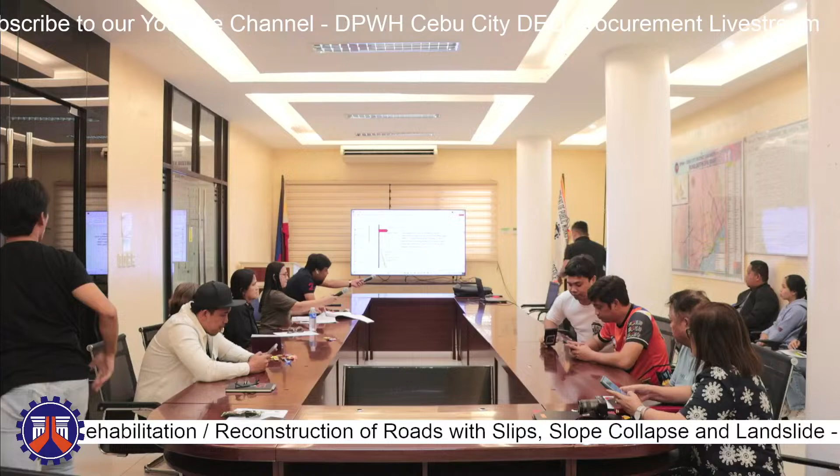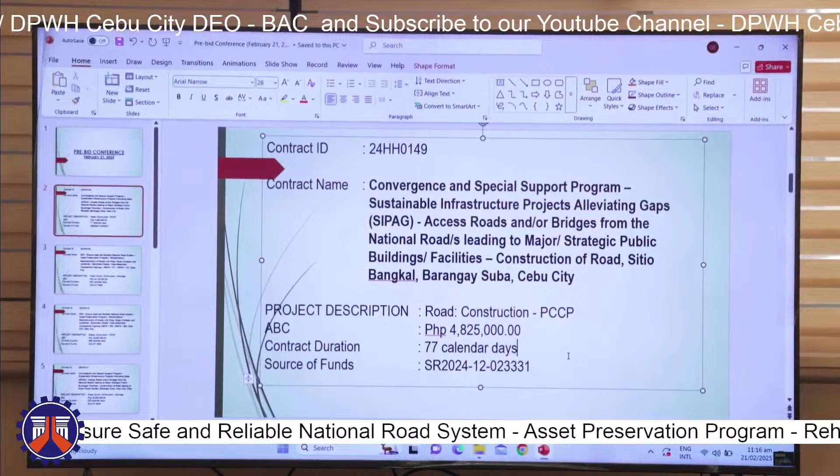Good morning, everyone. For the first project, we have construction of road in Barangay Suba, Cebu City, with a contract ID of 24HH0149, contract name Convergence and Special Support Program, Sustainable Infrastructure Projects Alleviating Gaps, SIPAG, access roads and/or bridges from the national roads leading to major strategic public buildings and facilities, construction of road, Sitio Bangkal, Barangay Suba, Cebu City. Project description: road construction, PCCP, with an approved budget of 4,825,000 pesos.

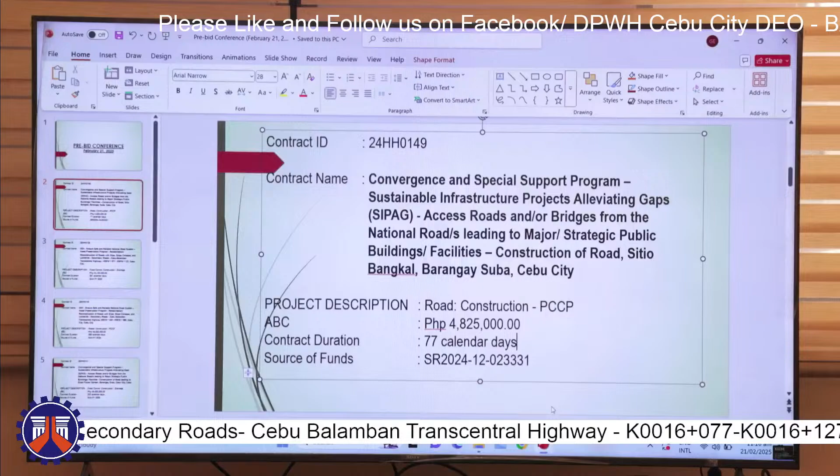Contract duration is 77 calendar days, and the source of funds is SR 2024-12-023331. For the major scope of works, but before that, there are two sections for this project. Section 1, station 4100 to station 4182, and Section 2 with station limits of 3800 to 3870, with a total net length of 152 meters.

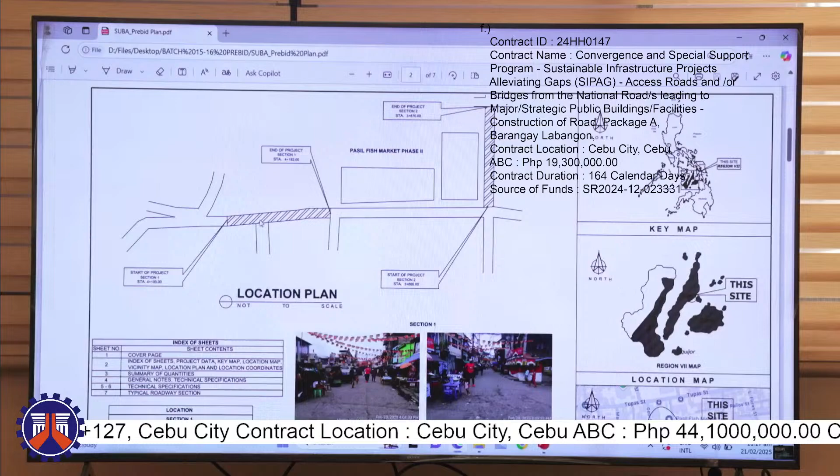For the second page, we can see here its location plan. The project is located near Pasil Fish Market Phase 2, in between Phase 2 and Phase 1. Section 1 is located at the Cebu City Fish Port. So here are the sections, Section 1 and 2.

For the major scope of works, we have surplus common excavation, pipe culverts and drain excavation, gravel fill, subgrade preparation, aggregate subbase course, PCCP with a thickness of 250 mm and a 3-day curing period, and reinforcing steel, structural concrete, metal frames and gratings, reconditioning of drainage structures, manhole, and concrete cover.

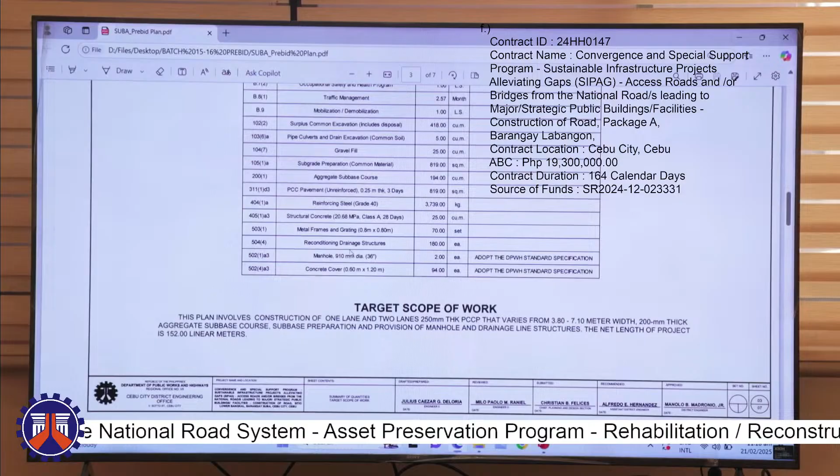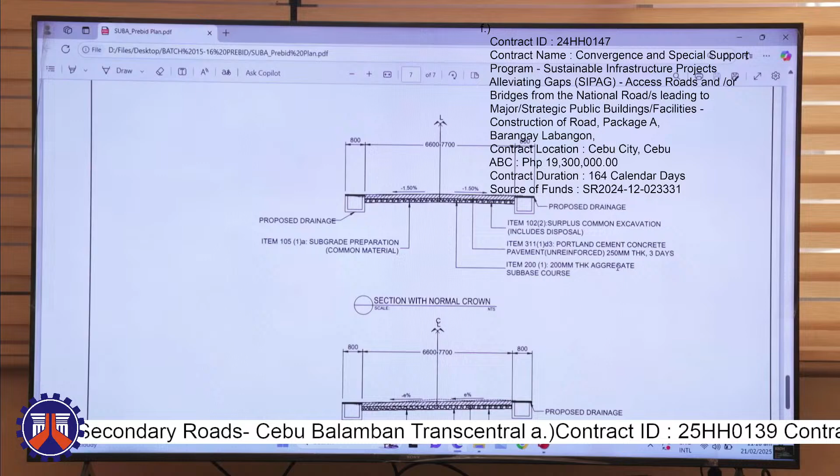For the next page, we have the general notes and technical specification of every item. For the last page, we have the typical road section. The items included are item 1022, surplus common excavation; item 311 D3 for the PCCP with a thickness of 250 mm, 3 days; and item 200(1), aggregate subbase course. We also have the proposed drainage that has a width of 800 mm. That would be all for the Barangay Suba Road Construction Project.

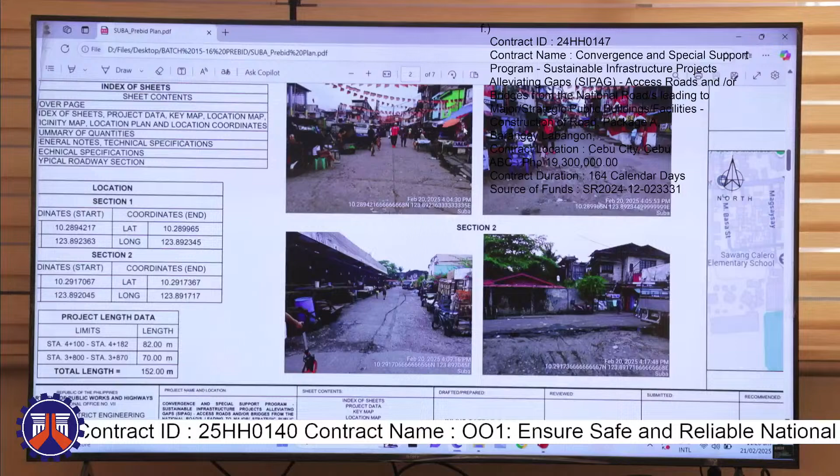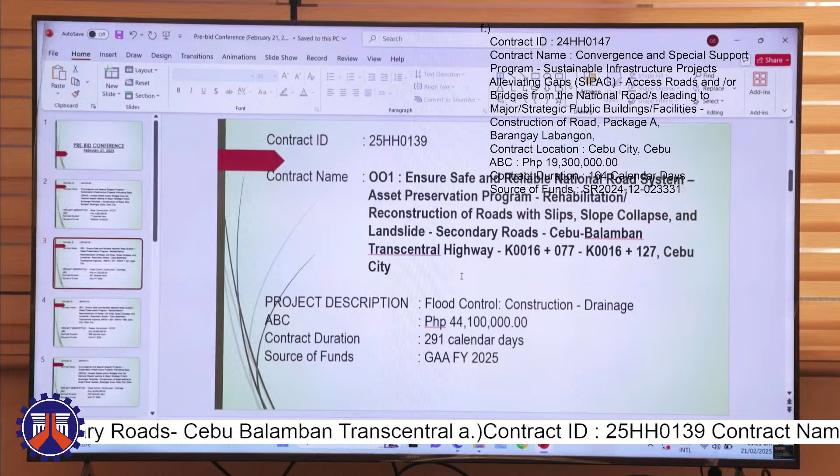Good morning. I'm here to discuss our next project with a contract ID of 25HH0139, contract name: Ensure Safe and Reliable National Road System Asset Preservation Program, Rehabilitation and Reconstruction of Roads with Slope Collapse and Landslide, Secondary Roads, Cebu-Balamban Transcentral Highway, kilometer 16 plus 077 to kilometer 16 plus 127, Cebu City. Project description: this is a slope protection project. The approved budget of the contract is 44,100,000 pesos, with a contract duration of 291 calendar days, and the source of funds is GAA FY 2025.

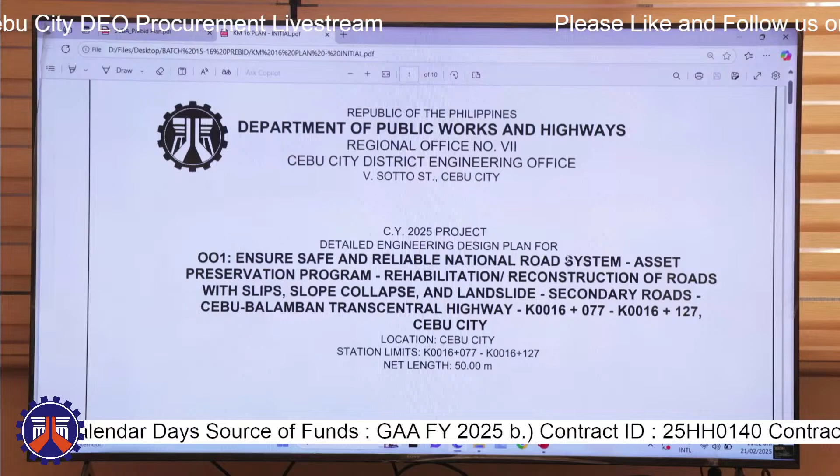And for our plan, our station limits starts at kilometer 16 plus 077 to kilometer 16 plus 127, with a net length of 50 meters.

This one is our location. This one is our end. The end of our project is the start of the previous slope protection project, this one.

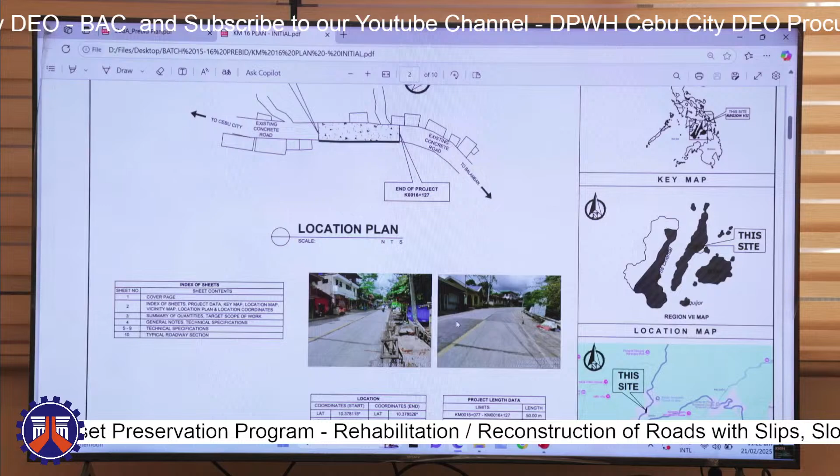Before our existing slope protection project, these are the exact coordinates for the start and the end.

Here is the summary of quantities. This one is our target scope of work.

This project calls for the reconstruction and rehabilitation of existing roads with slip, with the purpose that the foundation will lie on stable grounds, likewise utilizing the part of the slip pavement alignment as the detour road. The target scope of work is to remove the existing slip pavement, reconstruct and maintain it as detour until the duration of the project, which is to be extended up to the end of the slip section.

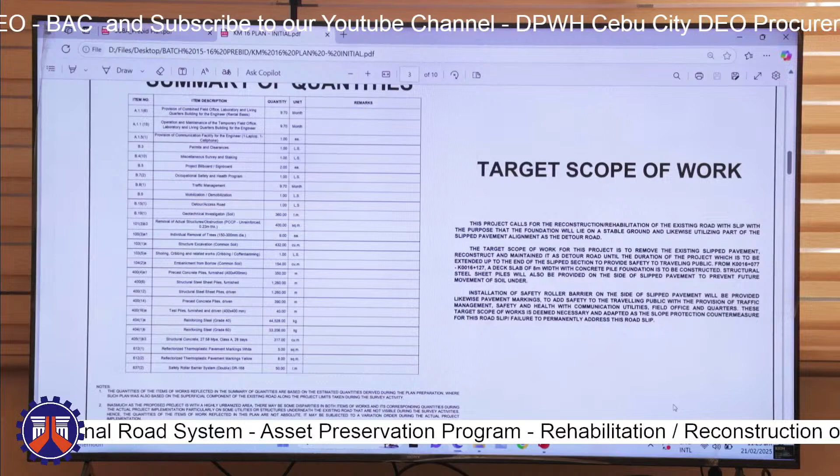From kilometer 16 plus 077 to kilometer 16 plus 127, a deck slab of 8-meter width with concrete pile foundation is to be constructed. Structural steel sheet piles will also be provided on the side of the slip pavement to prevent future movement of soil.

Installation of safety roller barriers on the side of slip pavement will be provided, likewise pavement markings to add safety to the traveling public, with the provision of traffic management, safety and health, communication utilities, field office and quarters.

This target scope of work is deemed necessary and adopted as a slope protection countermeasure for this road slip failure to permanently address the road slip.

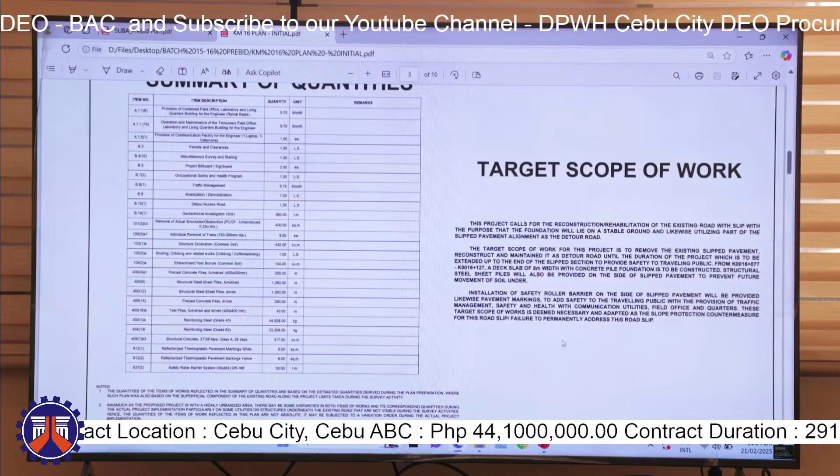This one, we have our precast concrete piles, this one, and structural steel sheet piles.

Next, we have our general notes and technical specifications, and lastly our typical road section, this one.

We have our deck slab here at the top, this one our concrete piles, then we have our sheet piles at the side, and then we have there our safety roller barriers.

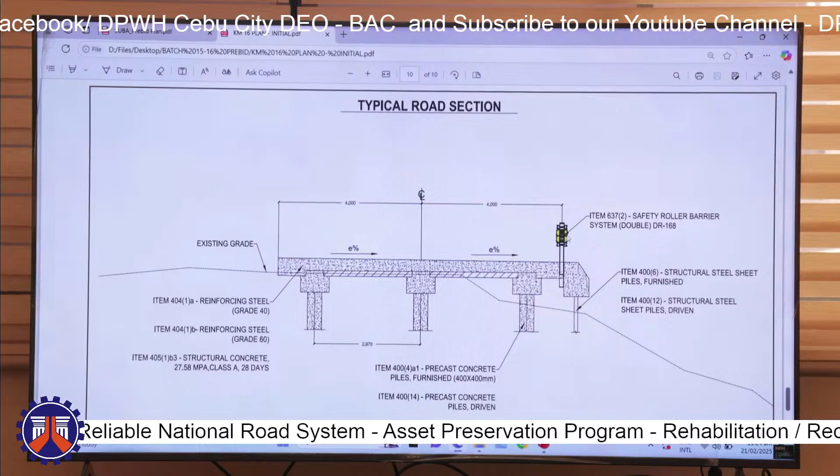And that's all for this project.

Our next project is kilometer 18.

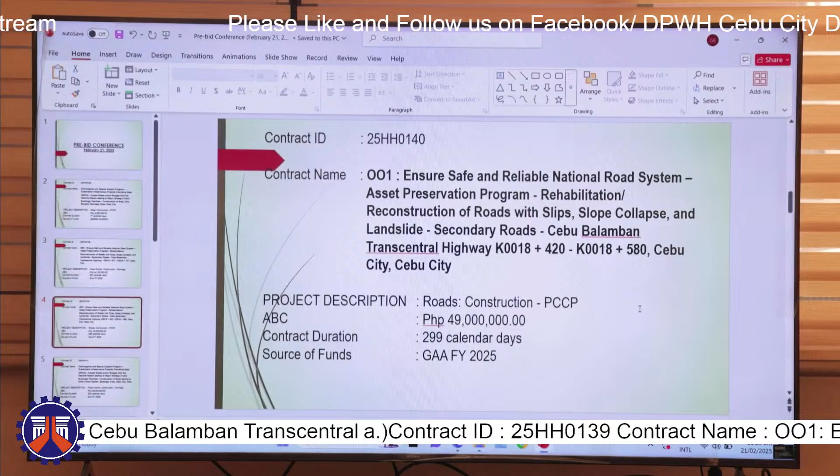The next project is contract ID 25HH0140, with contract name: Ensure Safe and Reliable National Road System, Asset Preservation Program, Rehabilitation, Reconstruction of Roads with Slips, Slope Collapse, and Landslide. Secondary roads, Cebu, Balamban, Transcentral Highway, kilometer 18 plus 420 to kilometer 18, 580, Cebu City, with an ABC amount of 49 million. Contract duration of the project is 299 calendar days, and source of fund is GAA FY 2025.

So the net length of this project is 160 meters. Here is the project location of the project.

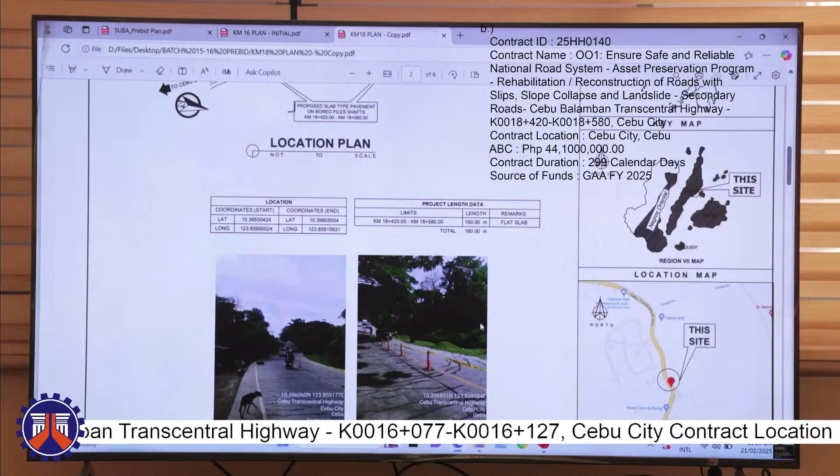So the current condition of the site is, this project is a continuation of our 2021 project. So here's the not updated photos.

For the summary of quantities, we have combined field office and operation and maintenance of the temporary field office, provision of communication facility for the engineer, permits and clearances, miscellaneous, survey and staking, project billboard, signboard, occupational safety and health program, traffic management, mobilization, demobilization.

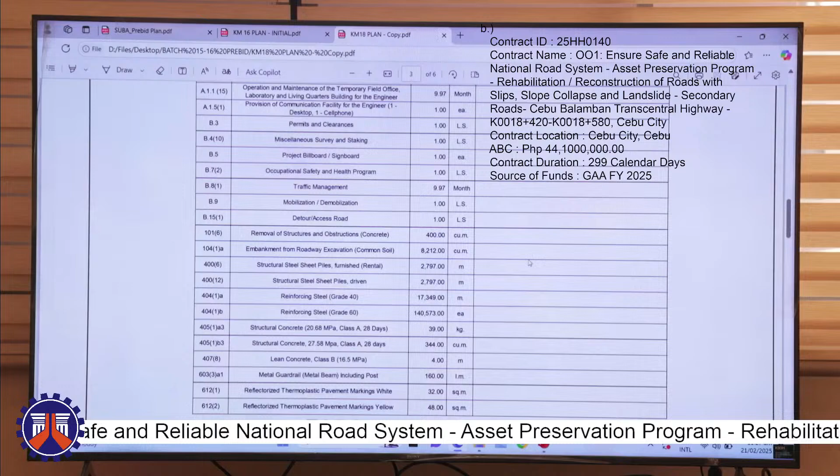We also have detour and access road, removal of structures and obstructions, embankment from roadway excavation, structural steel sheet piles driven, reinforcing steel, structural concrete, lean concrete, metal guardrail, reflectorized thermoplastic pavement markings.

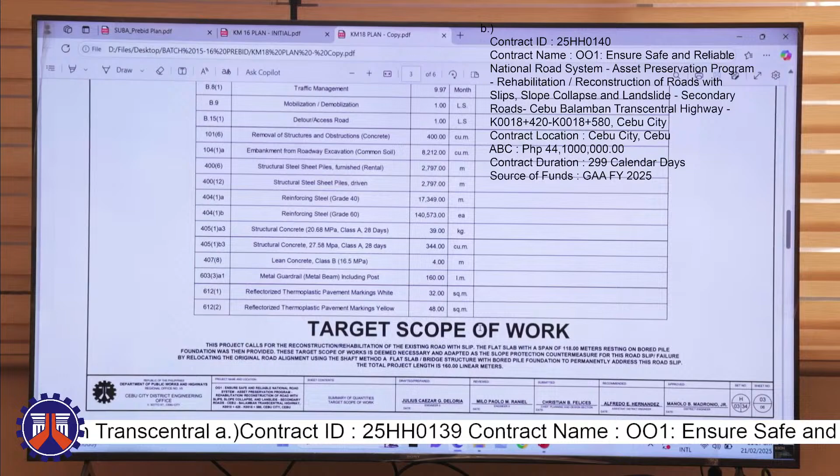So the target scope of work, this project calls for the reconstruction and rehabilitation of the existing road with slip. The flat slab with a span of 118 meters resting on bored pile foundation was then provided.

This target scope of work is deemed necessary and adopted as the slope protection countermeasure for this road slip by relocating the original road alignment using the shaft method and a flat slab bridge structure with bored pile foundation to permanently address this road slip.

The total project length is 160 linear meters. The CY 2021 scope of work is the bored piling. This project is the superstructure now, the flat slab na lang.

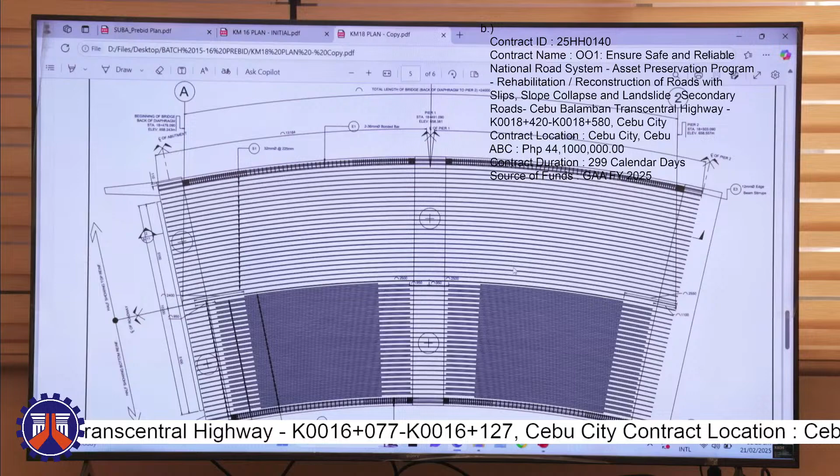So here's the general notes, the sample reinforcement, and here's the typical cross-section of the project.

So that's it for kilometer 18. Next one is...

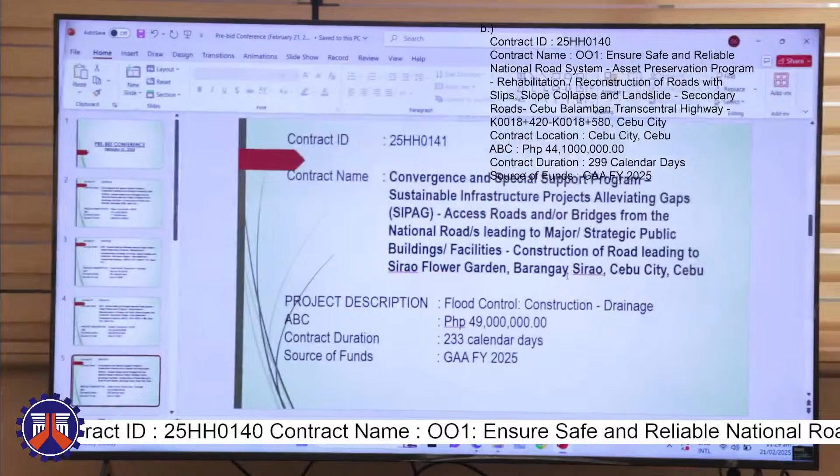Good morning, everyone. So I'm here to discuss the project with contract ID 25HH0141, with contract name Convergence and Special Support Program, Sustainable Infrastructure Projects Alleviating Gaps or SIPAG, access roads and/or bridges from the national roads leading to major or strategic public buildings or facilities, construction of road leading to Sirao Flower Garden, Barangay Sirao, Cebu City.

Forgive us, but the project description for this one should be roads, construction of PCCP, with an approved budget of 49 million and contract duration of 233 calendar days, with its source of funds being GAA FY 2025.

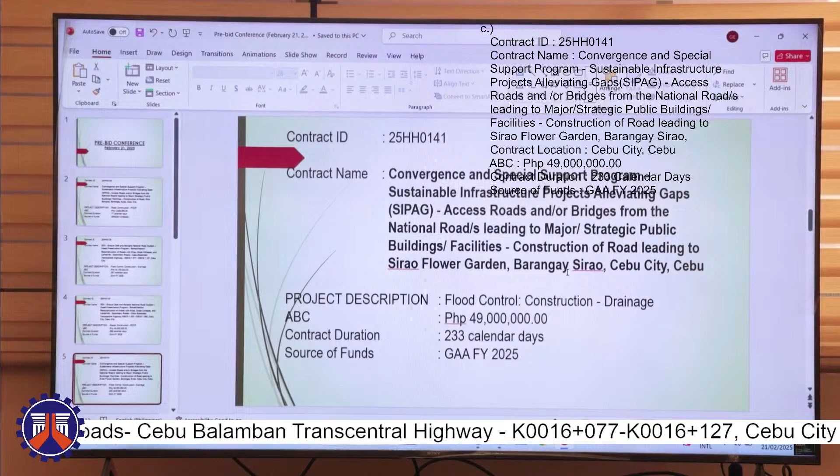So for our station limits, this starts at station 21,000 until station 21,962 with a net length of 962 meters. Here you will see the location of our project.

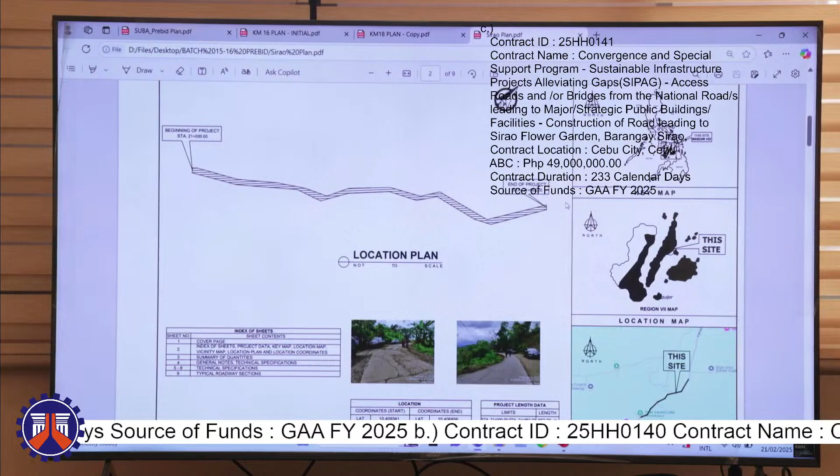So basically this starts right before, like this is the road leading to Sirao Garden, and it ends near Veco, before the Sirao Flower Garden. You will also see here the coordinates of the start and end of our project for easy navigation to our site.

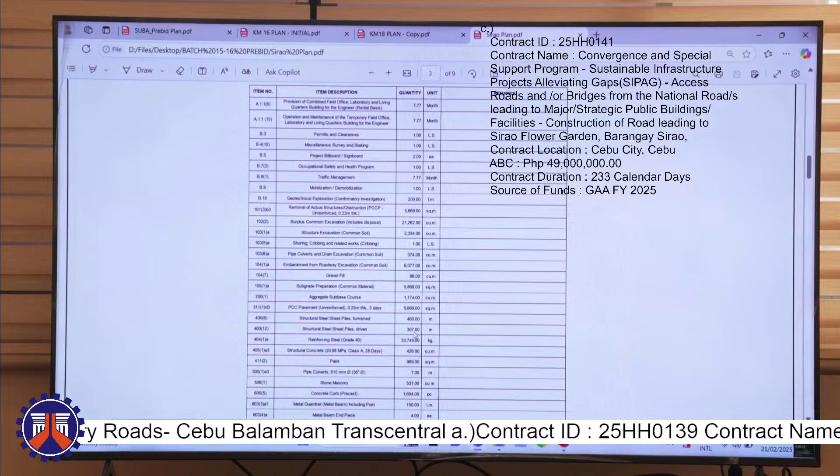Gravel fill, subgrade preparation, aggregate sub-base course, PCCP 0.25 meter thick, 3 days curing, structural sheet piles, structural steel sheet piles driven, reinforcing steel, structural concrete, paint, pipe culverts, stone masonry, concrete curb, metal guardrail, and metal beam end piece.

So here are our general notes and technical specifications included in this project.

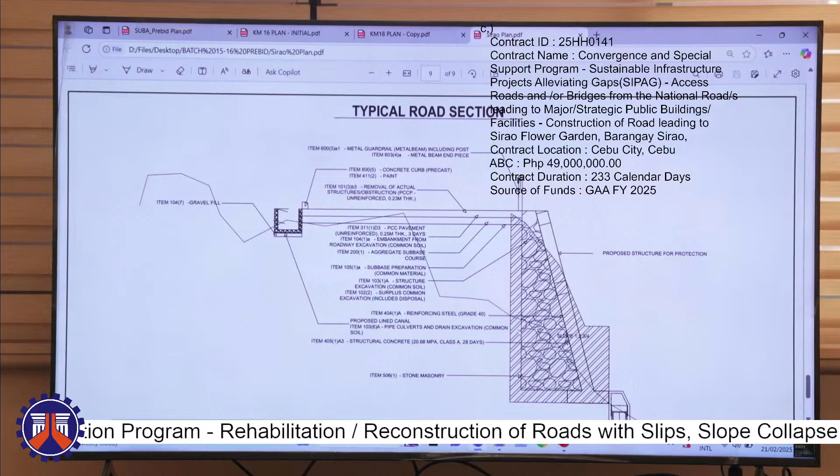And here is our typical roadway section. Basically, most of our project only includes construction of PCCP, but almost at the end of the project, we have slip protection going towards Veco. So you can see here that we construct PCCP with lined canal on our left side and slip protection on our right side.

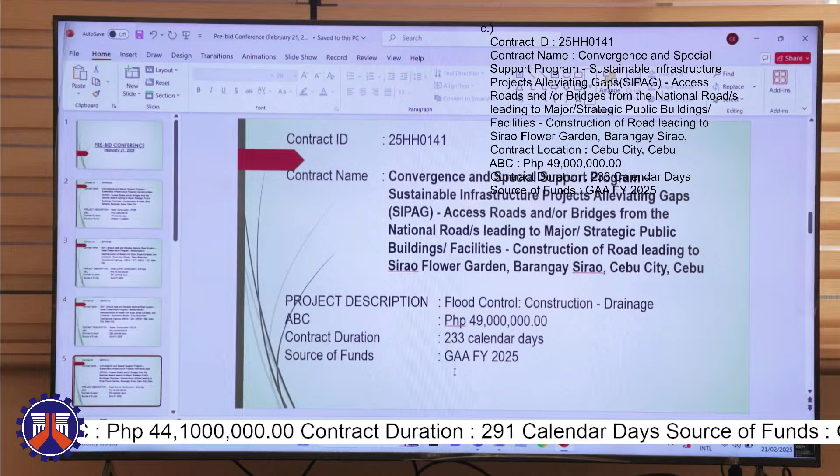Here, the stone for the protection as well as the structural sheet piles are furnished and driven right here. Other scope of works include the reinforcing steel, concrete, and our proposed lined canal. Yes sir, concrete is here. So that's all for this project.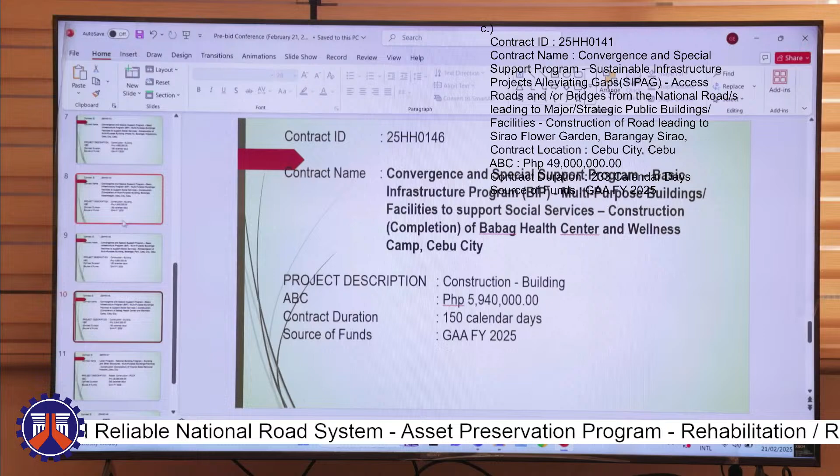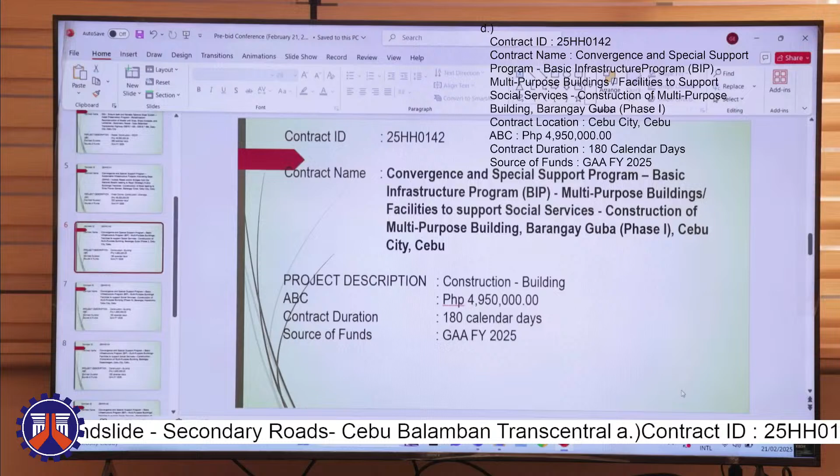Morning everyone, so let's continue. Contract ID 25HH0142 with the contract name Convergence and Special Support Program, Basic Infrastructure Program or BIP, multipurpose buildings, facilities to support social services, construction of multipurpose building, Barangay Guba Phase 1, Cebu City, Cebu, with the project description construction of building, with approved budget of contract 4,950,000, and contract duration of 180 calendar days, with its source of funds GAA FY 2025.

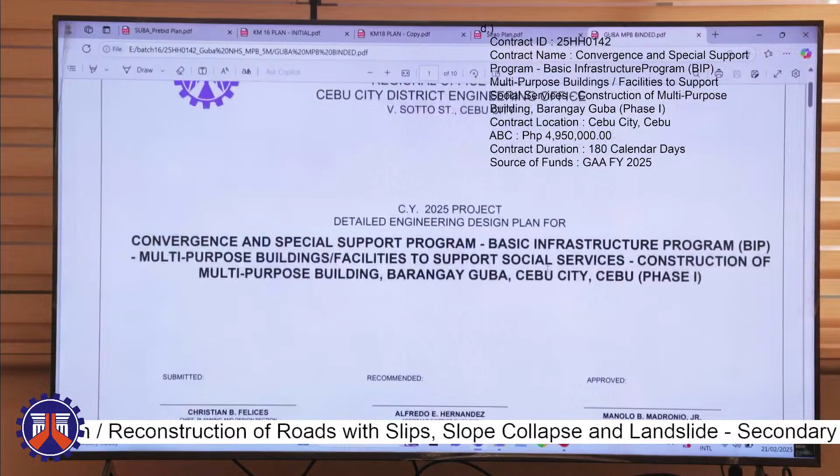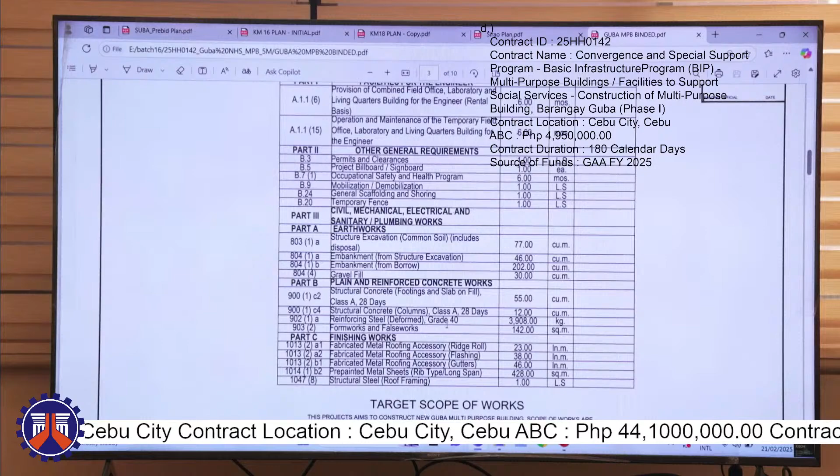So for this project, this is located at Barangay Guba National High School. The project is a construction of covered court. So this is the location. Its main scope of works consists of earthworks and structural works. The dimension of the covered court is 20 by 16 meters only with 10 columns.

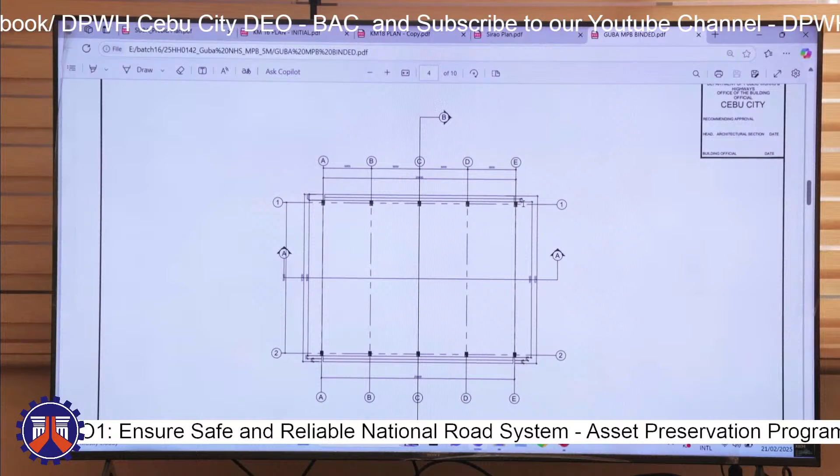There actually is an embankment since the floor is not level there. So there is item 804-1B embankment. And then 900-1-C2 structural concrete footings and slab on fill. Next is structural concrete columns. And then 902-1A structural reinforcing steel deformed bars grade 40.

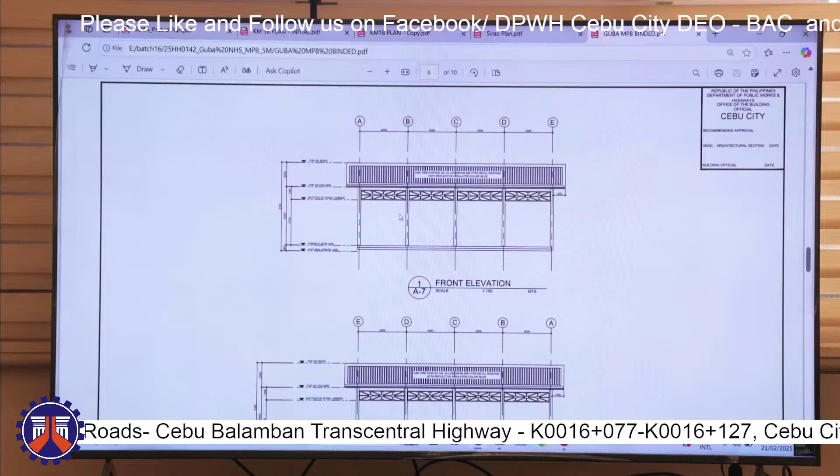Next, we have the roofing or finishing works. So 1013-2A1 for the ridge roll. And then there's flashing included and gutters. And then pre-painted metal sheets or rib type long span. Also included is the structural steel roof framings, trusses, and truss girders. So that's all for Barangay Guba. Thank you.

142, yes sir, Guba phase 1.

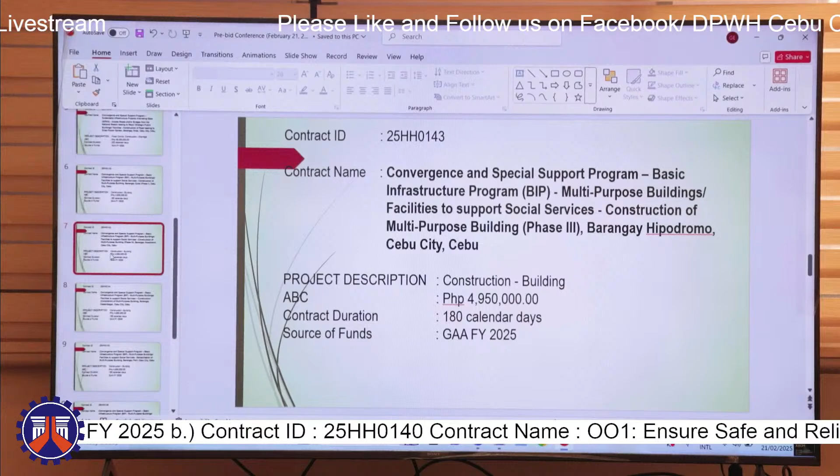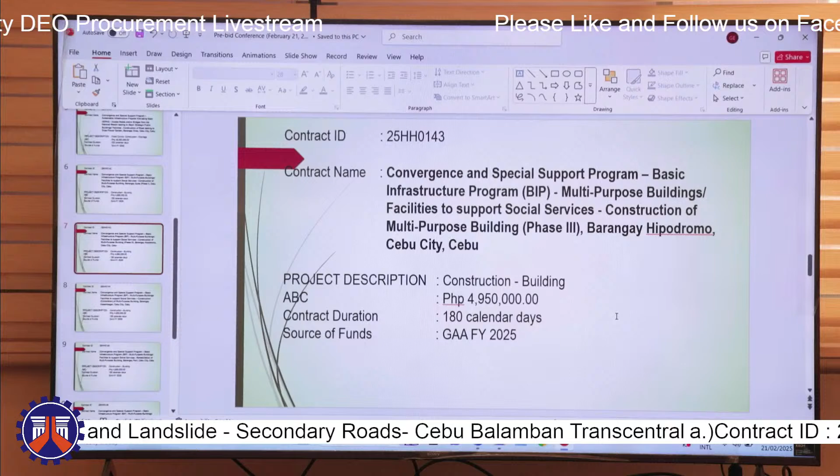Good morning. Next is the contract ID 25HH0143. Contract name is Convergence and Special Support Program, Basic Infrastructure Program, Multipurpose Buildings or Facilities to Support Social Services, Construction of Multipurpose Building, Phase 3, Barangay Hipodromo, Cebu City, Cebu. Project description is construction of building. And the approved budget of contract is 4,950,000 pesos, with a contract duration of 180 calendar days, and the source of fund is GAA FY 2025.

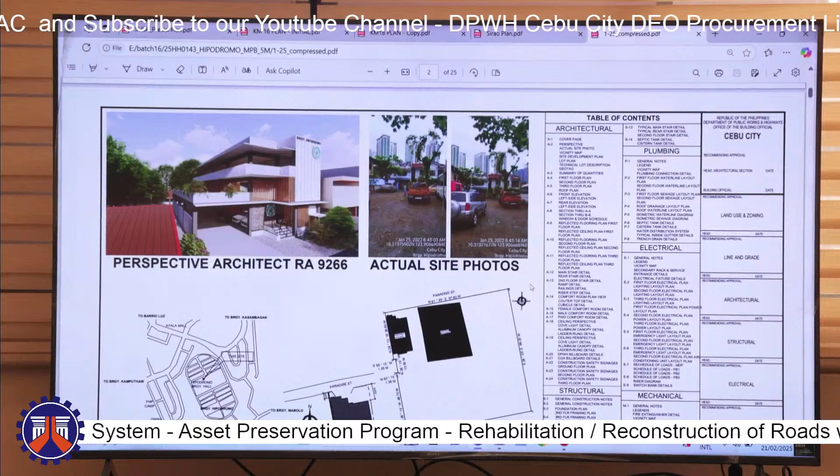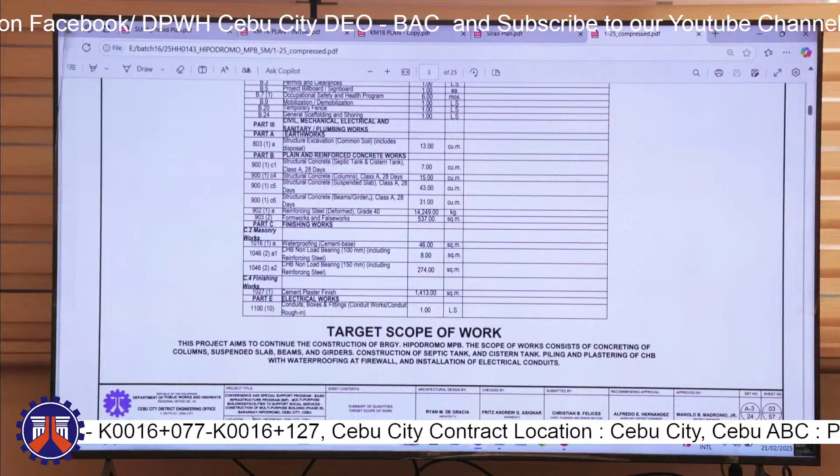So basically, this is just the continuation of the ongoing construction in Barangay Hipodromo. Yes, Hipodromo. So this is the actual site photos. And the summary of quantities and major scope of work is the construction and concreting of septic tank and cistern tank, the columns, suspended slab on third floor, beams and girders, and piling and plastering of CHB, waterproofing, and installation of roughing ins.

So phase 3 only consists of concreting from A to D. So columns from A to D and the suspended slab from A to D, from second floor to third floor. That's all.

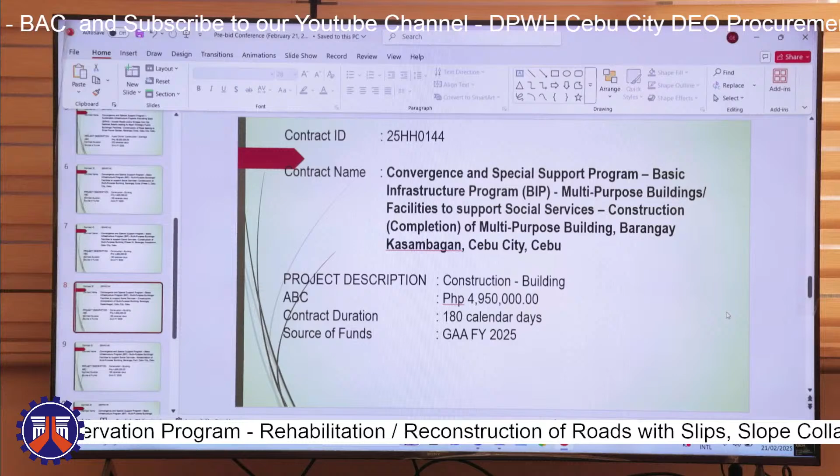Next, contract ID 25HH0144 with the contract name of Convergence and Special Support Program, Basic Infrastructure Program, Multipurpose Buildings or Facilities to Support Social Services, Construction, Completion of Multipurpose Building, Barangay Kasambagan, Cebu City, Cebu, with a project description of construction of building, and the approved budget of contract of 4,950,000 pesos, and the contract duration of 180 calendar days, and the source of fund is GAA FY 2025.

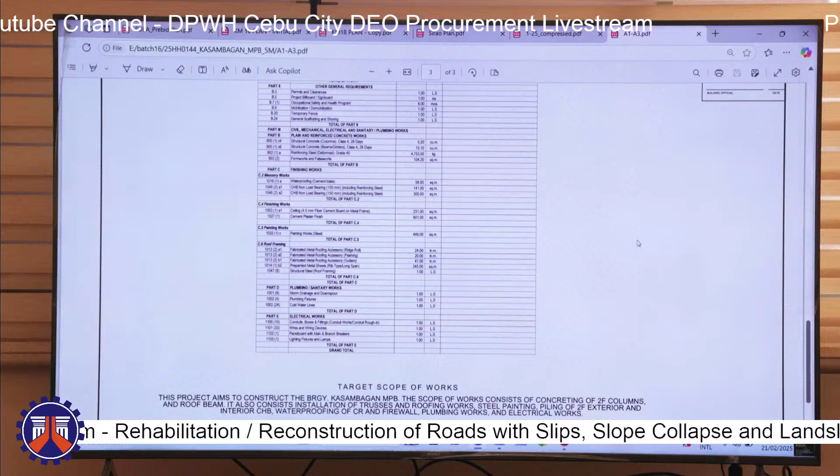So this is also a continuation of the ongoing construction there in Barangay Kasambagan. So the major scope of works consists of concreting of columns, beams, and girders at the second floor of the building, then piling and plastering and waterproofing of CHB in second floor, then the roofing works.

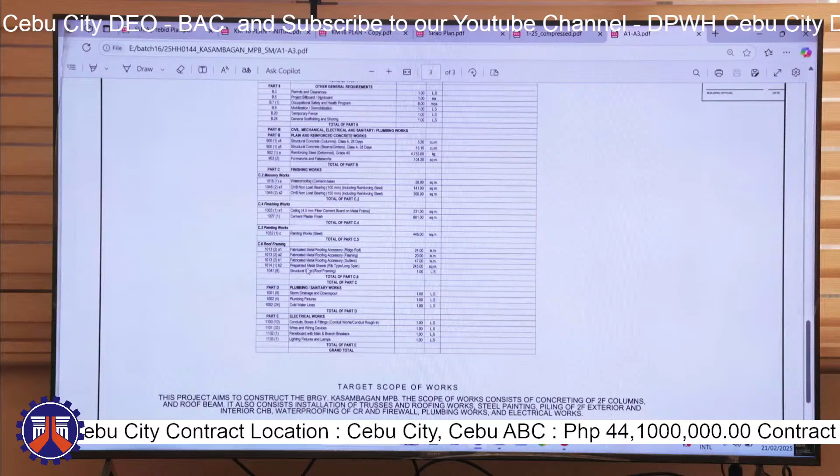Which includes the trusses, ridge roll, flashing, gutters, and pre-painted metal sheets, rib-type long span. Then the installation of downspout, plumbing fixtures at first floor and second floor of the building, and cold water lines. And also the electrical works, which includes roughing ins, wirings, panel boards, and lighting fixtures.

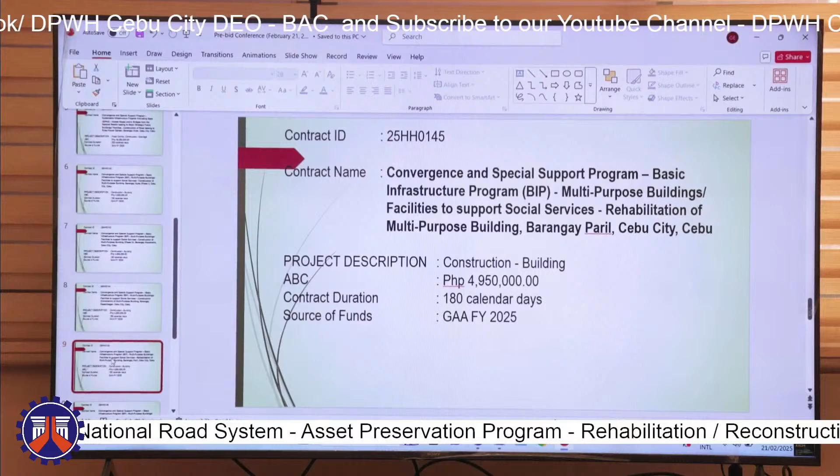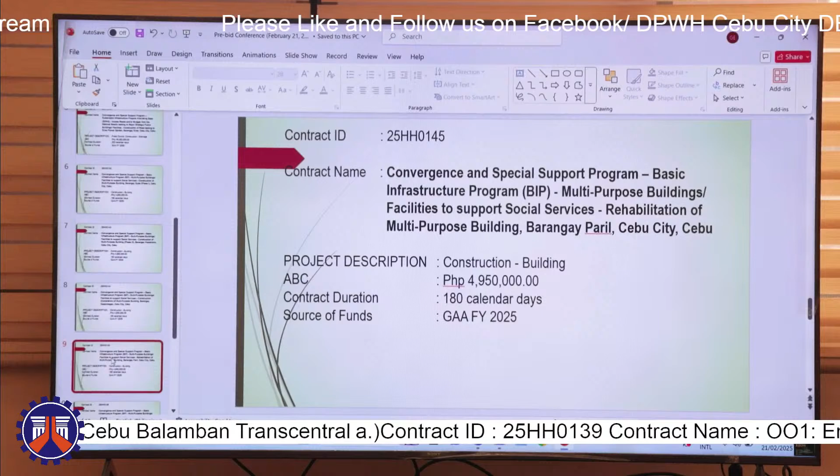Next. Good morning everyone, I will discuss Contract ID 25HH0145 with Contract Name Convergence and Special Support Program, Basic Infrastructure Program BIP, Multipurpose Buildings or Facilities to Support Social Services, Rehabilitation of Multipurpose Building, Barangay Paril, Cebu City, Cebu, with the project description construction, building, and approved budget of contract 4,950,000 with contract duration 180 calendar days and source of funds GAA FY 2025.

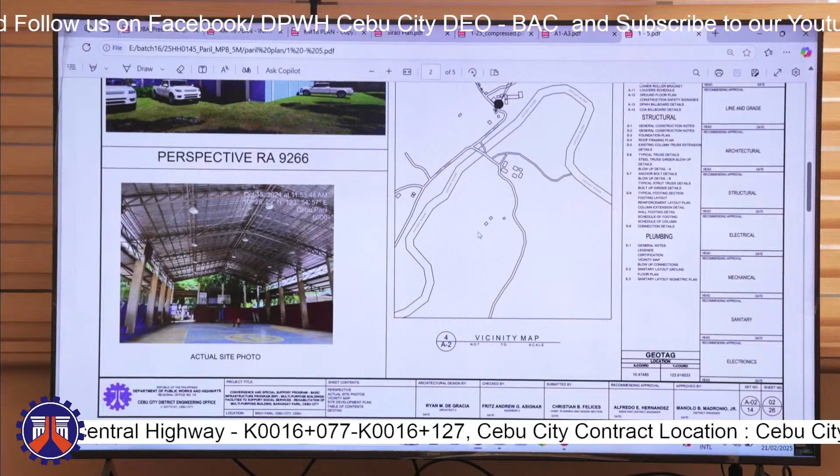So this is the perspective and the location of the project. For the summary of quantities, the major scope of work includes extension of the main roof and replacement of the roofing sheets of the canopy. So that is item 1013-2A1 fabricated metal roofing accessory ridge roll, 1013-2A2 flashing, 1013-2B1 gutters, 1014-1B2 for pre-painted metal sheets rib type long span, and 1047-8 structural steel.

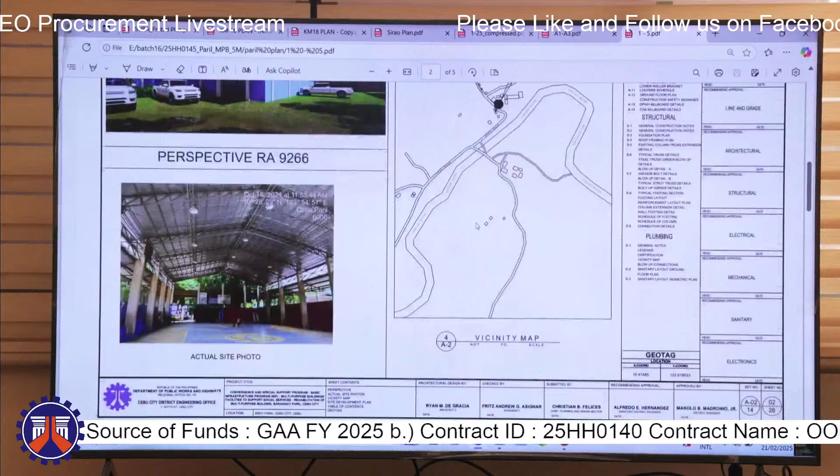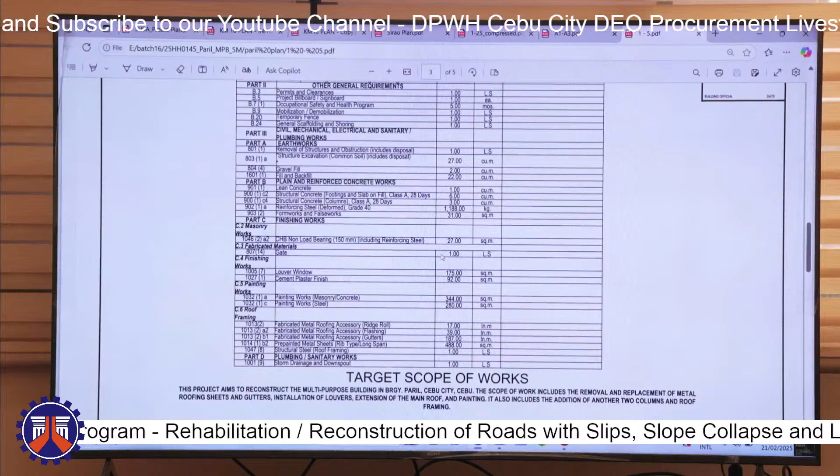Then it also includes the construction of 2 additional columns, item 900-1C2 and item 900-1C4 structural concrete columns. Then we also have the extension of the fence and replacement of the gate. Then also installation of louvers, item 1005-7 louver window. And lastly, painting works, item 1032-1A painting works for masonry or concrete, and 1032-1C painting works for steel. That's all for Barangay Paril.

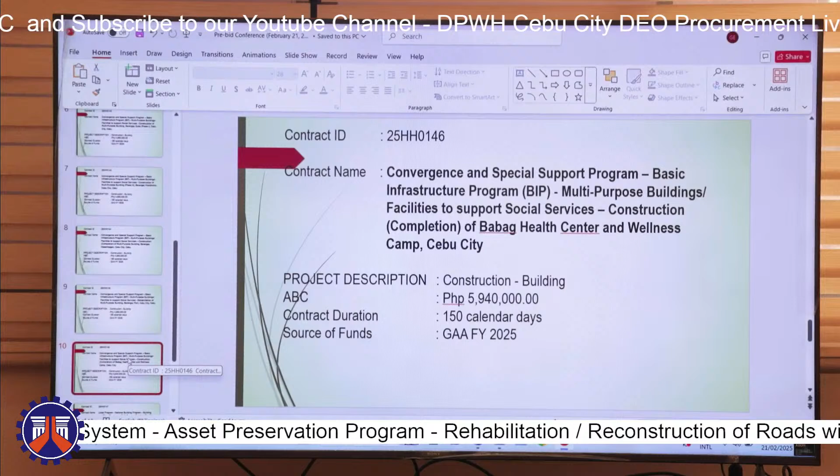Next is the contract ID 25HH0146 with a contract name of Convergence and Special Support Program, Basic Infrastructure Program, Multipurpose Building or Facilities to Support Social Services, construction completion of Babag Health Center and Wellness Camp, Cebu City, with a project description of construction of building and approved budget of contract of 5,940,000 and a contract duration of 150 calendar days, and source of fund is GAA FY 2025.

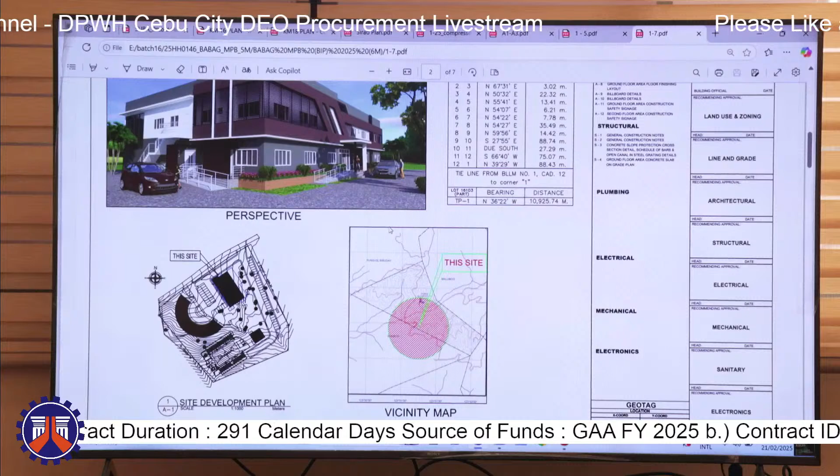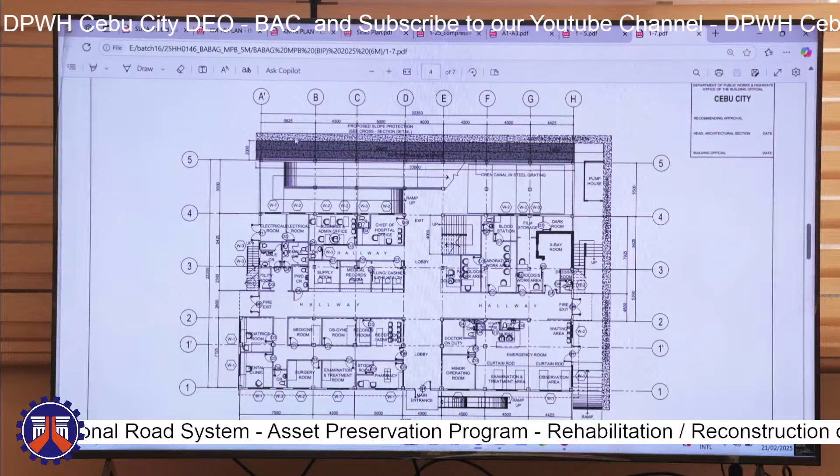So the major scope of works consist of structural concrete of slope protection with a length of 26 meters and concreting of open canal with 33 meters long. This is the proposed slope protection at the site and the proposed open canal. It also includes the glazed tiles in this site and unglazed tiles in the comfort rooms and ramp, and also the fabrication and installation of metal frames and gratings for the open canal.

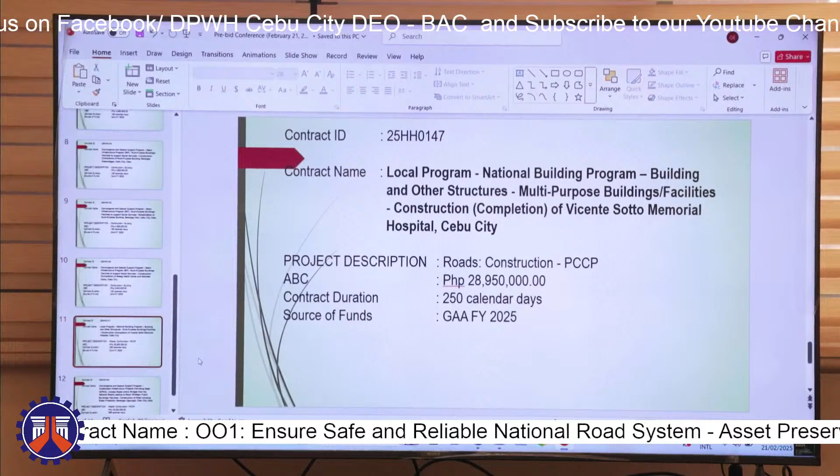Next, for contract ID 25HH0147, contract name, local program, national building program, building and other structures, multipurpose buildings, facilities, construction completion of Vicente Sotto Memorial Hospital, Cebu City, with project description, buildings, construction of buildings. Approved budget for contract is 28,950,000 with a contract duration of 250 calendar days, and its source of funds is GAA FY 2025.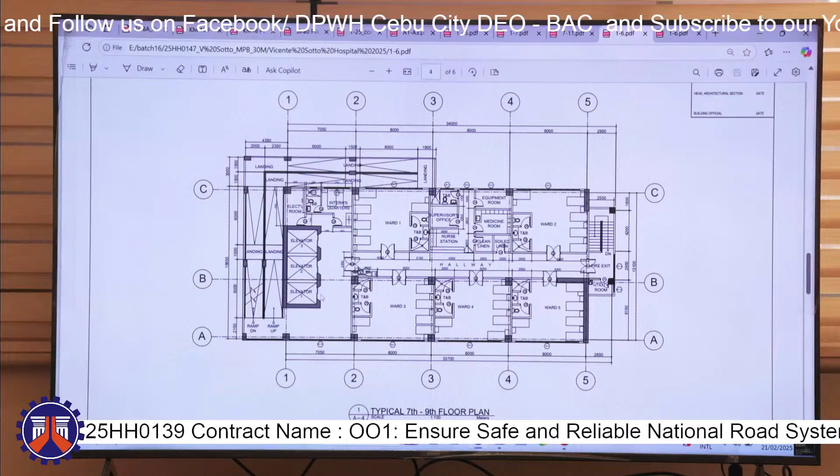Next is the CHB installation, located at the 8th floor to the 9th floor level to enclose the whole level, with included also the cement plaster finish and the painting works in this area.

Next is the aluminum frame glass doors located at the 8th to 9th floor level also, same with the glass windows, sliding type, fixed type, and awning type, all located at the 8th to 9th floor level.

And for the railings, we have the railings here at the ramp side and the fire exit side. It's the same from 7th to 9th floor as well.

Next is the ceiling works, located at the 8th floor and the 9th floor level, so the whole area will be installed with the ceiling and the painting works.

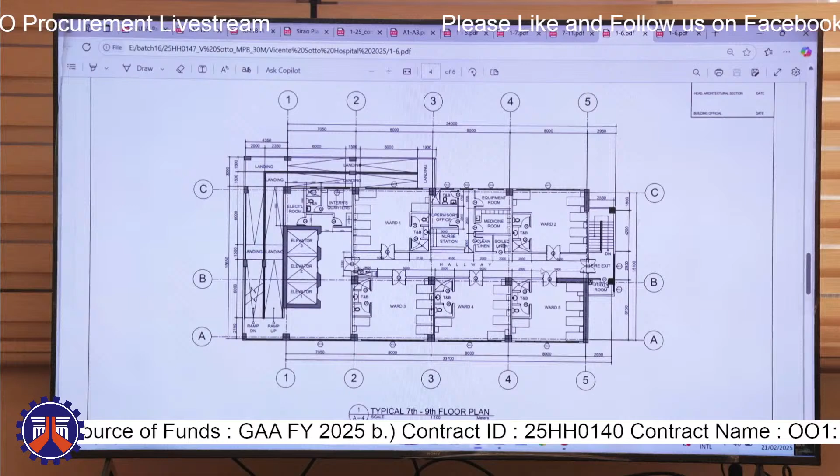Next is glazed and unglazed tiles, same location, 8th floor to 9th floor. Glazed tiles for the common area and unglazed tiles for the comfort rooms.

And next, lastly is the installation of the oxygen, nitrous oxide, gas, manifold and duplex vacuum pump, medical air outlet, medical oxygen outlet, and medical vacuum outlet, all mechanical works to be embedded, from 7th floor to 9th floor level.

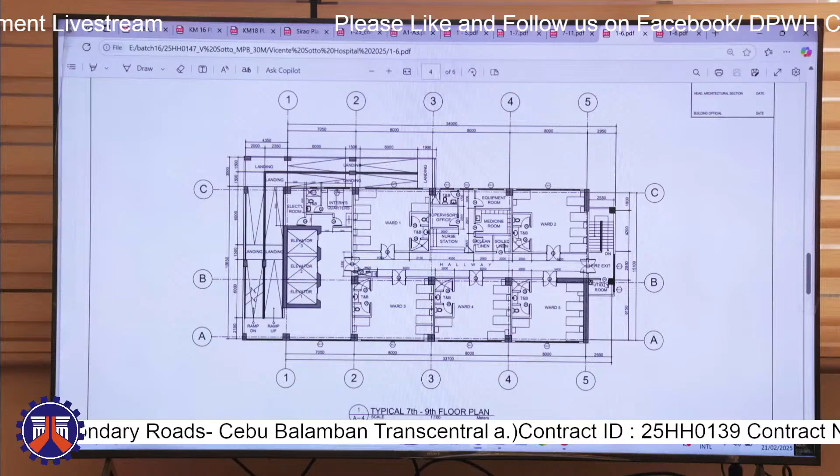And lastly is the installation of the air conditioning unit from the 8th floor to 9th floor. So that's all for Vicente Sotto.

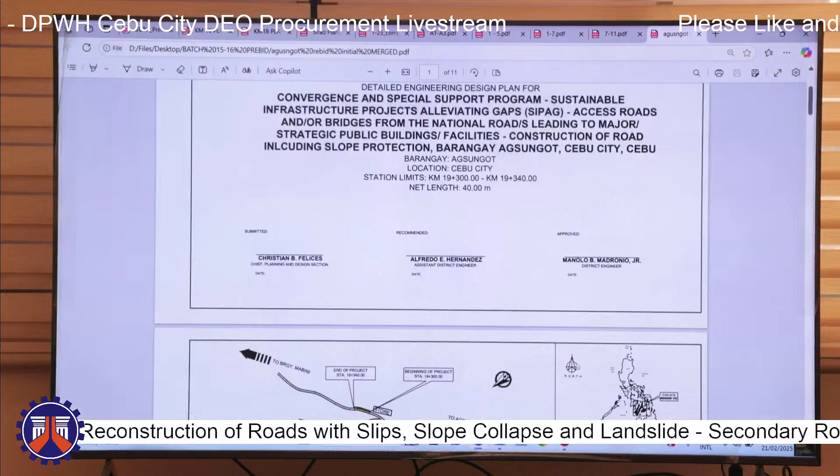Good morning everyone. With contract ID 25HH0148, Convergence and Special Support Program, SIPAG Access Roads and Bridges from the national roads leading to major strategic public buildings, facilities, construction of road including slope protection, Barangay Agsungot, Cebu City, Cebu.

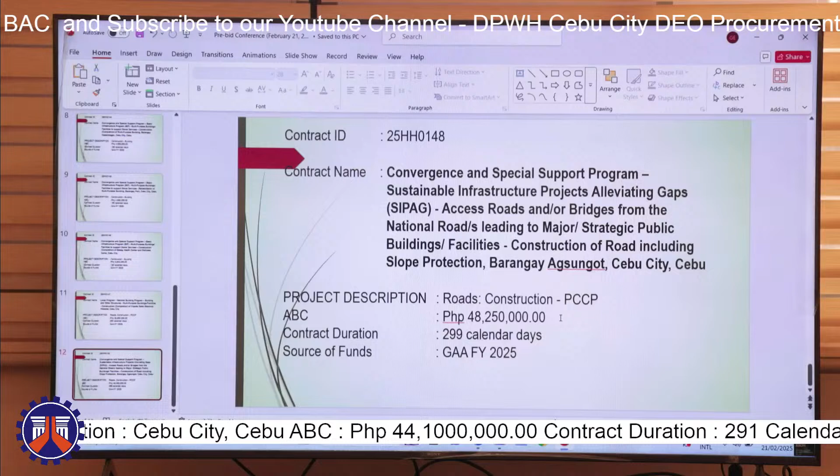The ABC of this project is 48,250,000 with a contract duration of 299 calendar days, and its source of funds is GAA 2025.

So the station limits of the project is from 19,300 to 19,340, having a net length of 40 meters. Then the location map of the project.

The project will provide slope protection at the left side and then slip protection at the right side, and we will also work on the PCCP.

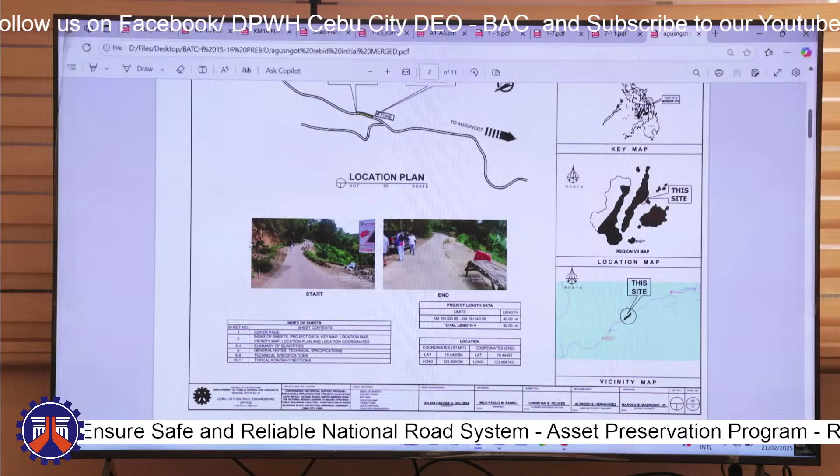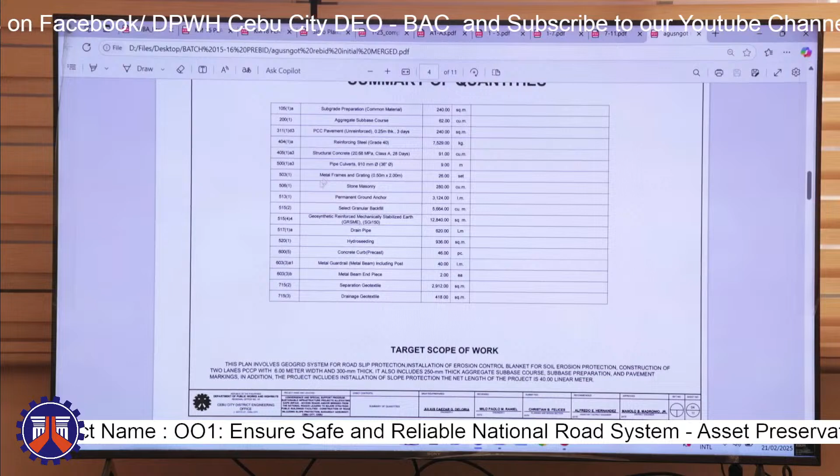As for the summary of quantities, we have the usual scope of works, and then for the major scope of works, we will provide detour or access roads, removal of existing PCCP, removal of structures and obstruction concrete, surplus common excavation, surplus excavation of hard rock, structure excavation, shoring and cribbing, pipe, culvert, and drain excavation, embankment, gravel fill, subgrade preparation, aggregate sub-base course, PCCP, 3 days, 0.25 thickness, reinforcing steel, structural concrete, pipe, culverts, metal frames and gratings, stone masonry, permanent ground anchor, select granular backfill, geosynthetic, reinforced mechanically stabilized earth, drain pipe, hydroseeding, concrete curb, guardrail, metal beam end piece, separation, geotextile, and drainage geotextile.

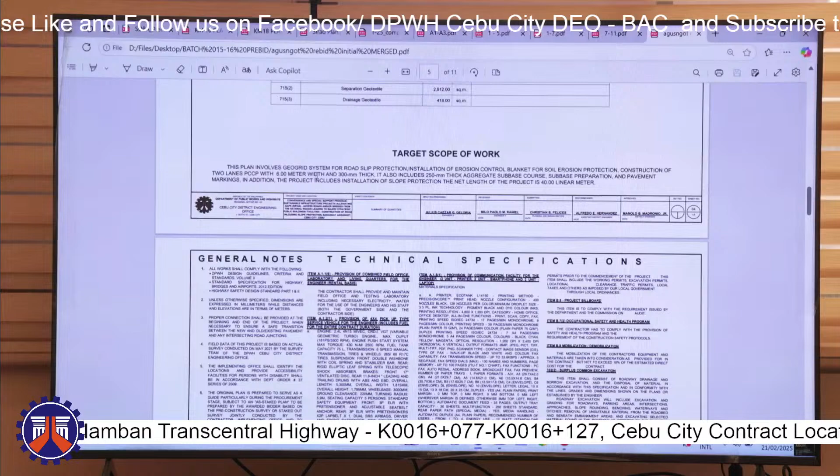For the target scope of work, the project involves the use of geogrid system for road slip protection, installation of erosion control blanket for soil protection, construction of 2 lanes PCCP with 6 meters width and 300 mm thickness, and it also includes 250 mm thick aggregate sub-base course, and its net length is 40 meters.

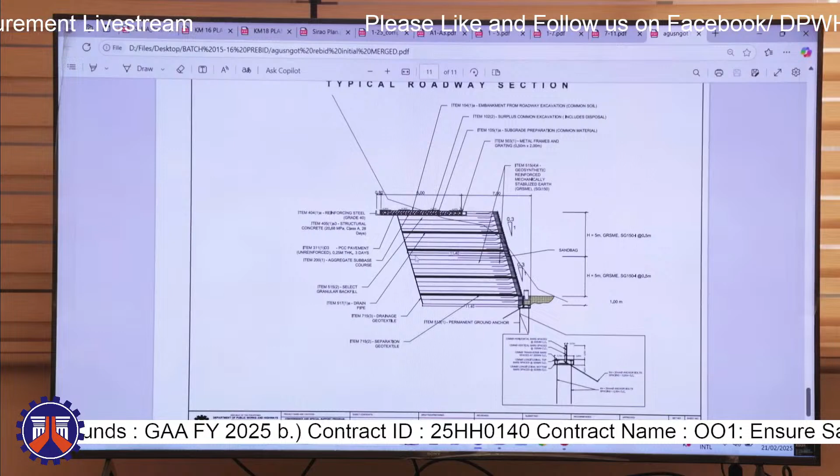So the following pages show the general notes and technical specifications. This is the typical section for the left side, the slope protection will be providing, and this will be the cross section for the right side, which will be the slip protection and the PCCP. That's all.